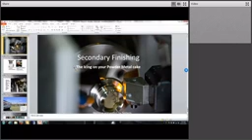The idea of this webinar is to further our knowledge and the uses and applications of powder metal and its components, and how powder metal might be suited to your business.

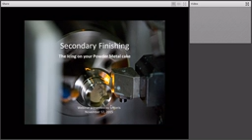Today's agenda: why PM? Why would you choose PM? We're going to review why you would use it and what the benefits are. A net shape or a near net shape. The intent of powder metal was to have a net shape component, in other words, not to have to machine it. In some cases, though, the tolerancing becomes when you get into 10,000ths of an inch, or 10 microns, or 8 microns, then you come to the point where secondary operations may be necessary. It could also be useful for finishing, could be for hardening. There are several reasons you'd use powder metal secondary operations. We're going to give you 4 good reasons why you'd use secondary finishing, reasons to select Syntris as your secondary finishing source for your powder metal applications. And we're going to give you some best case applications, and have an opportunity for question and answer.

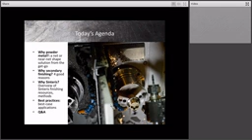Founded in '72, serving automotive, industrial, and consumer markets worldwide scale. We ship to many countries around the world. We do manufacturing of the PM components as well as secondary finishing and sub-assembly. We're located about an hour from Detroit, and about 40,000 square feet under roof.

Powder metal advantage. Why choose PM in the first place? Well, in the previous webinar we discussed this, taking powder from its original state, which you see on the top left, to its finished product, which could be after the sintering operation, but also be after secondary finishing, where you've taken a component from a finished block, from a single block to a finished detailed part. The intent, of course, with powder metal is to get to a simple net shape, but in cases, again, of required secondary operations for tighter tolerances, this is what happens.

So we took parts from powder through compaction to the sintering process and then secondary finishing.

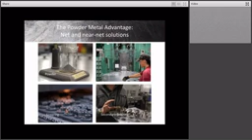So why secondary finishing? Why would you do it? Well, the tolerances may become too tight for the powder metal net shape component to hold. When you get to that point, for example, and again it depends on the diameter of the component, but if you've got a 3-inch, 4-inch outer diameter component, you can't hold much more than perhaps 8/1000ths of an inch in tolerance. And if you need to get tighter than that, then you may have to add secondary machining. In the case of the component you see before you, that has, I believe, 8/10,000ths of an inch of tolerance on the diameter, and that thing is rough turned, fine turned, and then ground precisely on lengths and diameters.

Also, why would you do it? You want to have secondary parts assembled, so you want to take that and make a finished assembly. So the objective should be to get components assembled as this one is, for example, where we actually manufacture the small component that goes on the top. We purchase a specific form pin that is pressed into the component and holds that component in place.

Also, secondary finishing, you look for single source solutions. The objective should always be to keep the cost down, and single source solutions are something that's important to most customers.

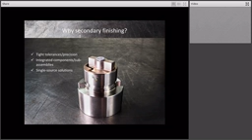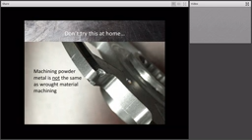And don't try it at home. Powder metal is not like machining wrought material. It has its nuances. It certainly can cause, you can have issues with damage or breakage that you wouldn't see on a standard component made out of wrought material, simply because of the nature of powder metal, where there's a degree of porosity in the component. So effectively in powder, you have components made of particles of powder separated by small voids, so each of those particles becomes a hard component to machine. So each time the insert from a machining insert, for example, hits those components, those small particles, it's like a hardened strike on the part, which can break down the inserts. So that's something that we at Syntris certainly have learned over the years, and we feel that we're as good at turning or machining powder metal components as anybody in the world.

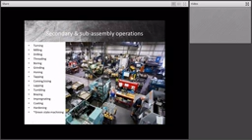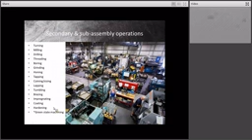We do pretty much everything from turning and milling and grinding to hardening, impregnation, and coating, as well as green state machining. I'll talk about green state machining in a little bit because it's not proprietary, but it's something we do relatively uniquely.

As far as sinter hardening and steam treatment, which is the next operation after the pressed or briquetted component - during the sintering process, it's possible to take that component and rapid air cool it after the heating process, which will yield a component with a hardened surface and apparent hardness of about Rockwell 35C, which is in the neighborhood of where you'd expect to see through hardened components.

It's cost effective, it happens within our facility, and the components don't go outside. They're not subject to the occasional damage you see from typical heat treat operations, and you end up with a hardened part that's much cleaner and not covered in the oil or soot that often results from through hardening or case hardening.

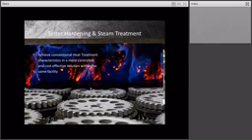Another opportunity is with steam treatment. Steam treatment increases the hardness slightly on the outside of the component because it places a steam oxide coating, where a high pressure steam oxide is introduced to the surface. Steam is introduced, the oxide forms, and you get that blue colored component that has a slight bump in hardness and a little bit of rust inhibition.

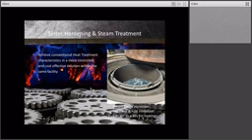So you get a few more hours of salt spray durability. Actually, the idea of the key for coating comes from steam treatment - the oxide actually holds the coating in place so it doesn't peel off if you're using some specialty coatings.

Now I want to talk a little bit about green state machining. Relatively unique in our industry is what we do with this. We worked many years ago with a major powder supplier to develop a process for machining parts prior to the sintering operation - in other words, when they're still basically like a raw cookie that could be broken.

Effectively what happens is the particles are glued together, and then the machining can take place, as you see in this component, where there's actually a groove cut between a full-length tooth. The idea with the groove cutting is to make it cheaper and faster, because cutting that severely interrupted cut in a tooth on any component, whether wrought or powder metal, would be expensive in terms of inserts.

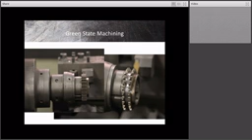Yet we can take the same component, do it in the green state, and then sinter harden it to yield something that looks more like this - which, although in function isn't normally a sinter hardened part, this one has been sinter hardened. It has that typical gold finish you see in a sinter hardened component.

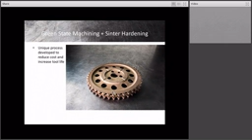So you've taken a part that's been machined with a groove cut between teeth so it can run multiple chains, and at the same time it's been machined in the green state, which causes much longer tool life and generally lower cost. It adds a curing operation, necessary to make the powder stick together for the machining, but that's not a high-cost operation, and it generally runs a little cheaper than solid-state machining.

So let's talk a little bit about what's next in machining: hard turning or roughing. You see a component on your right that is the as-pressed component. There's a couple of reasons for that component being made that way - most of the reason is because of powder distribution.

When you press a component, there have to be places for the powder to go within the pressing tools, so it has to be displaced somewhere. You couldn't press this form into this part - perhaps some of it, but not much, and the powder distribution wouldn't allow it. So in order to make it a more robust component, you press it as you see on the right.

On the left, you see the rough turn component. In other words, if you don't need a super tight tolerance, that might be enough. With rough turning, maybe the surface finish isn't quite so critical, so we can hog that material out a little quicker and a little cheaper. The idea is that it would be less expensive to the customer and ultimately makes a better product with the tolerancing necessary.

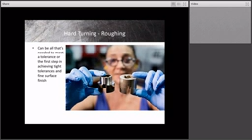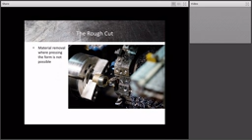Here's a good shot of the rough cut, where that same component is actually being cut in the rough state. And if we couldn't press it, we had to machine it - in this case, it needed to be machined to maintain the robustness of the component.

Now, finish cut. Hard turning may be necessary. In both cases, this is hard turn. The material is a sinter hardened component. However, the rough turning is done with a different insert, different speeds and feeds. The fine turning of a finish cut is very tight.

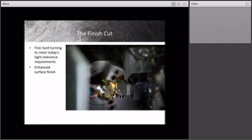Smooth finish that will give you a much more consistent finish for perhaps any requirements of bearings or anything that happens to be, or something runs on the component, and also for tolerancing. So the objective of the fine turning is, in this case, we not only turn the outside diameter, we also cut an additional groove because of the insert type, and we also give it a very fine finish, and that gives you that enhanced surface finish.

Beyond that, the same component is then taken to a grinding operation, usually an external angle grinder, with a customized wheel that's designed to hit 3 surfaces at once on this component. The objective with this component is then to grind the OD to ensure that you've got perfect roundness with a very tight tolerance, less than 8/10,000ths of an inch on those diameters.

When the requirements do go beyond those things that you can achieve with turning, grinding may be an option, and it certainly gives a nice finish.

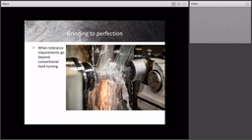So, from powder to finished product, you saw this component. Here's the component that we manufactured. You can see what we've got. It's a solid part that was pressed basically for robustness. And then from that step, it went through the process to a finished component.

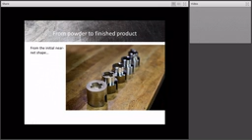So then you can see the finished component, which is now an assembled, fine-turned, round diameter, grooved component with an assembled piece that actually meshes with another component, needs that flexibility. So we've taken that component that we actually make and assembled it into the fine hard turned external. Both of these, again, would be Rockwell 35C in finish and hardness.

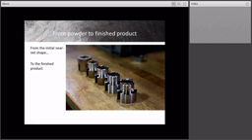So in cases where there is no opportunity to turn the part, in other words, the part can't rotate because of the configuration or because of the desired configuration of the feature that you want to place into the part, you might want to do vertical milling. We do a significant amount of vertical milling that allows us to make oblong shapes or cut S-type or infinite shape grooves into flat components, and allows us to do a variety of things, up to and including broaching of components, which is something we've only just recently gotten into using as a prep for gears.

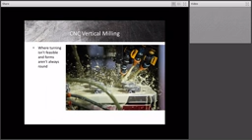The next step might be fine grinding. Now, what you see before you are precision pump plates that are held to about 4 or 5/10,000ths of an inch in tolerance on the length. Those components are fine ground in a machine that's dedicated specifically for their application. Could be used for gears, could be used for pump plates, could be used for gerotors. There's a variety of things that can be done, and it's also capable of lapping. So it's very close to a lapping operation, which is a very fine, very low material removal component operation.

The objective here is obviously to give us consistent quality, and this is something that's monitored during the process by the operator. As people often say, grinding is almost a fine art, and in this case, we find this to be true.

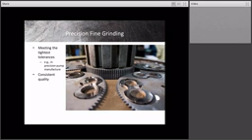So let's talk a little bit about our finishing. We like to think of ourselves as putting things together in cells where it makes sense. You can see the flow of the componentry. The part that we showed earlier, there's a raw pressed material going through our first operation of the rough turning to our second operation of the fine turning and the grooving and the prep for the grinding operation, which is the final operation. So we've got a simple, straightforward flow of components, single piece.

We do the same thing with other major volume components where the parts are flowed through the system with an intent to yield the consistency that's necessary for what our customers demand. We also gain the labor efficiency. Although it looks like there's a lot there, the cell is actually operated by 3 people on a normal basis. You might see some training going on there.

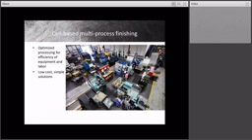Quality, we measure it and we guarantee it to the best of our ability. We verify what we do using CNC-controlled CMMs as necessary. We also have in-process gauging, and we certainly value the use of attribute gauging to ensure fit function capability for the customer.

Very often, tolerancing is laid out. What we've found is tolerancing may be laid out by engineers for one practice, but by the time the part gets to finished, that may not be the case. The part may not fit, and attribute gauging can often benefit in use there.

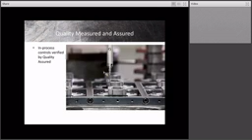So what's the bottom line? Single source solutions - the idea is to keep the part from going around to different locations. We've used secondary machinists in the past, and we've had spotty luck in our use of that, simply because they mark it up. There are costs that ensue as a result, and there's also markup margin that they apply, and potential risk in terms of stock that could be out of tolerance and large inventory in process. So there are a few steps with a PM near net blank.

That's another benefit to secondary finishing. Near net gives you very close to it. The components you see have some green machining on them. This has been green machined. The other component had some green machining that you can't see because it's flipped. The other part in the middle is a hardened hub that shows a good example of a lot of PM applications in the machining operations - grooving, honing, turning. There's a fair bit of operation there.

And there are fewer external vendors. In other words, less freight, one margin impact. I've already mentioned that an external guy is going to mark it up again. We don't do that, because clearly when they mark it up, you mark it up on top of that, and customers don't want to hear that and don't want to see that.

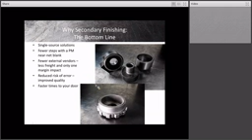And reduce risk of error. As I said before, we contain it within our facility rather than have it go outside. We've had some horror stories in the past of outside machinists where they've had nightmarish runs that have caused tremendous problems for us. I think we can get it quicker to your door. One of the objectives is always just in time, and our goal is to do it as fast as possible.

Integrated components, assembly - we conduct a little bit of assembly here. We're certainly open to other assembly ideas, and there's always an opportunity to further streamline and add value within our operation rather than sending it out.

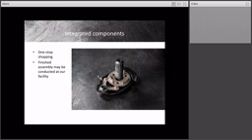So, horses for courses - it's a phrase that could be used to describe how PM is. For some people, one man's junk is another man's treasure, that type of thing. Certainly, it allows us to generate components that meet the customer's requirement.

We like to think outside the box. We like to look at how cheaply we can do this for our customer, because they certainly need it, because their customers usually demand it as well. And ultimately, the goal is to keep the cost down with the best possible quality.

We can select specific materials for the application, and then where it makes sense, we put in secondary finishing. You may need to have tolerances. As I showed you before, that component that had been pressed and then significantly machined in the rough state was for durability. You couldn't manufacture a part that would hold together without having some machinability, as well as cost and productivity benefits.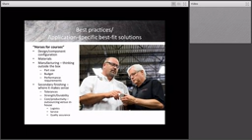In terms of no outsourcing, the logistics are simpler. They're all here - the service is out of our facility, and quality is maintained through our facility.

The next step is the most important one for Centrus. Let's talk - the sooner the better. It's very important that the earlier in the design stage we can get to you, the better we can make your component. Usually the less expensive we can make your component, and more often than not, more manufacturable. They all go hand in hand. So the sooner we get to the customer, and the sooner we can work with engineers to develop the component, that is the best possible opportunity.

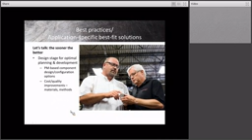And it allows us for cost and quality improvements using different materials that may be better than other ones specified. We've had cases where people have come to us with materials that have been, let's call it, less than ideal in our view. However, they've already been specified, so we're stuck with these materials, and they have their inherent problems, whereas if we get the opportunity, we can perhaps recommend something better for the application. Sinter hardening is a good example of that, where we've had customers that have specified through hardened components. We'd like to move them to Sinter hard, but now it's locked in, so you can't change.